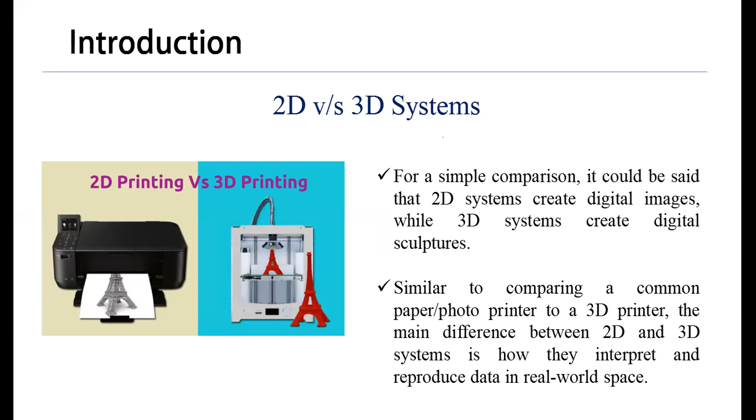So in a 2D system, your depth data will be missing. It is flattened within the two-dimensional space, so the Z-axis information won't be there. Like a photo, the depth is perceived from the shadows and lighting. But a 3D system reproduces a complete 3D shape. Actually, you will get to know the complete shape or the geometry, including depth.

So this depth gives you an advantage in dimensional analysis, whereas a 2D system's strength is only the collection of color data. And why I'm telling this difference between 2D and 3D systems is most of the scanners actually use a combination of both of these. It's not just that you directly get a 3D model or the 3D data. It combines the 2D color maps and overlays them to create a complete 3D final output. So that's why it is important to understand the difference between 2D and 3D systems.

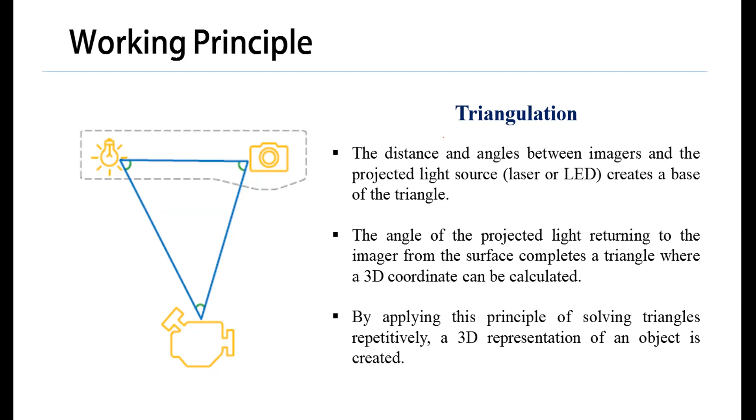If we look at laser triangulation, the only difference is the source of light. Instead of LED, here we are using a laser light, which can be a laser line or a single laser point.

First, the scanner will project a laser onto the object, and that laser light will reflect from the scanned object. That initial trajectory itself will be modified, and this modified trajectory will be picked up by a sensor. Then based on this modified trajectory, we'll be able to detect the deviation angle.

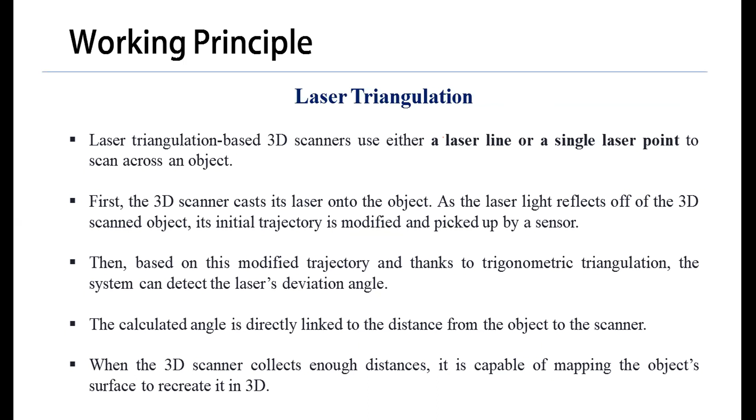This is very important. Based on this deviation angle, you can directly calculate the distance between the object and the scanner. So when the scanner collects enough distances, it is capable of mapping the whole object surface. This is the principle behind laser triangulation.

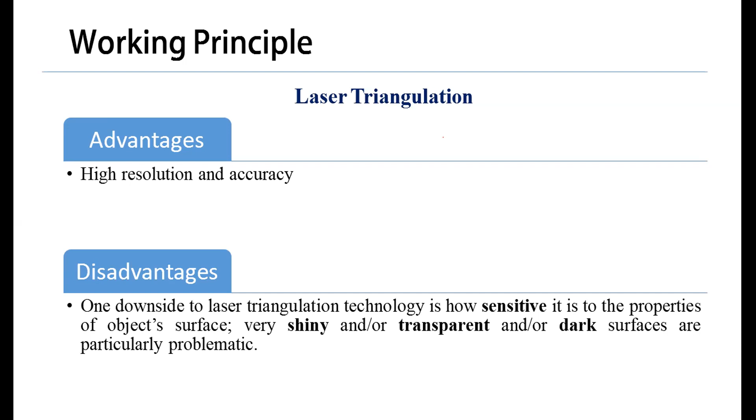If you look at the advantages, it has high resolution and accuracy, but the disadvantage is it is very sensitive to the properties of the object surface. For example, if it is a very shiny or reflective surface, it is not able to capture it, or if it is a transparent or dark surface. These are some of the surfaces which are very problematic when it comes to laser triangulation.

Now the second one we'll look at, this is actually a very popular technology. It's used for metrology grade portable 3D scanners, called structured light 3D scanning. Here the difference is it uses trigonometric triangulation, but it does not rely on a laser.

This light source will project a complete pattern. Normally this pattern can be a series of grid lines or a dotted matrix. The system is then able to examine the edges of each line in the pattern and how the lines are deformed, and based on that it calculates the distance from the scanner to the object surface.

This light can directly use white light or blue light. Standard projectors can also be used in these scanning devices, called digital light processing technology. The projected pattern is usually a series of light rays, which can be a grid pattern or a randomized dot matrix.

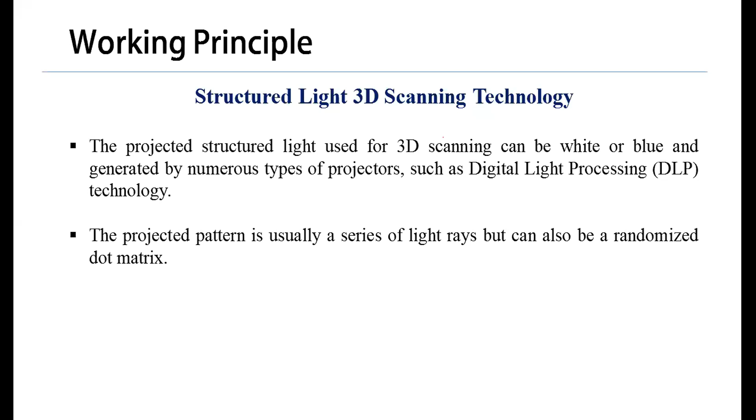When you look at the advantages of structured light scanning, the main advantages are its speed and resolution, because it directly projects the complete series of patterns. With laser triangulation, it was only a laser line, and that line has to travel across the complete part. But here, you can arrange the projector distance so that the whole pattern covers the entire part.

One more advantage is it is non-harmful light, so it can be used for 3D body scanning, as I was telling, for medical imaging techniques.

But the disadvantage is these are very sensitive to lighting conditions. The same advantage we got from the light is also making a disadvantage, that is, it is very sensitive to lighting conditions and it will have trouble working outdoors in broad daylight.

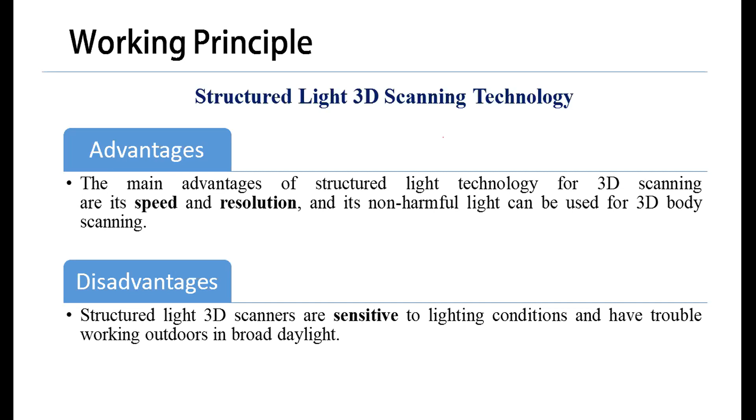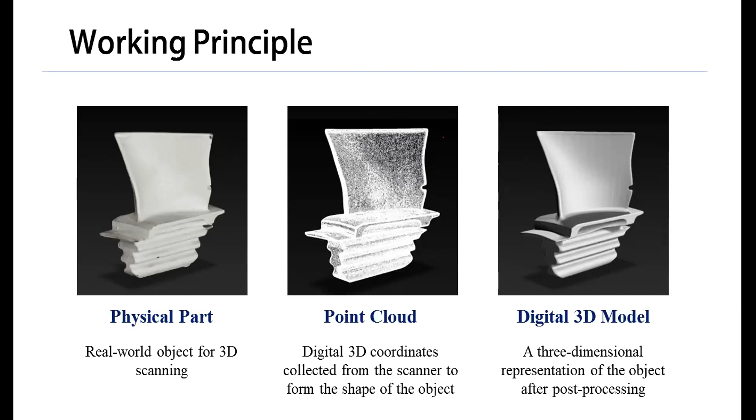Finally, the output we are getting is a three-dimensional representation of the object, but post-processing is required after that. For example, if you are scanning a mouse, you might have kept it on a table, so along with that, even the table will be scanned. That minor geometry cleanup and all is called post-processing, which you need to do so that you get the required object 3D data.

Next we have the photogrammetry technique. But before that, I think we can go for a small demo. I'll just check with my team, Mr. Sumit and Mr. Kiran, if they are ready with the demo. First we'll look at the demo, then we'll come back to the presentation.

I think Kiran... I'll just check with my team. Kiran, I think you can unmute and you can speak.

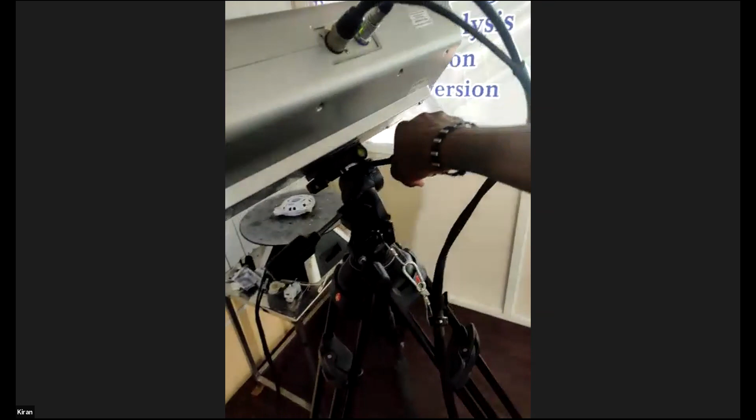It has one camera and one projector. Can you see here? Yeah, we are able to see. This one is the camera, this one is the projector. This is the tripod stand. We can adjust the height here by moving like this. This one is for rotating. This control is for up and down. This one is for axis.

This is the part I have to scan now. It works on the triple scan principle. Can I start scanning? Yeah, you can start it. I will share a screen.

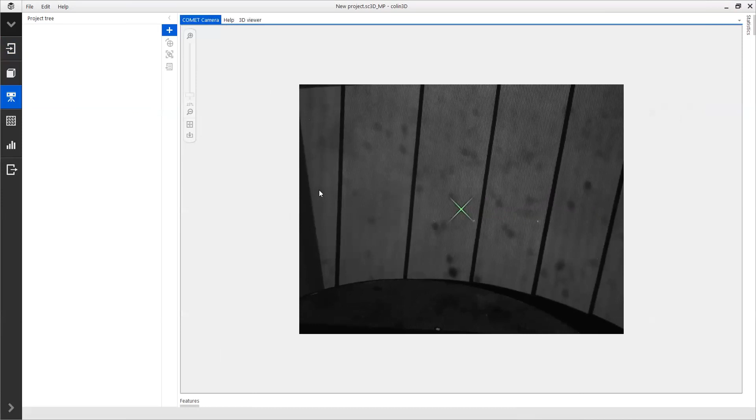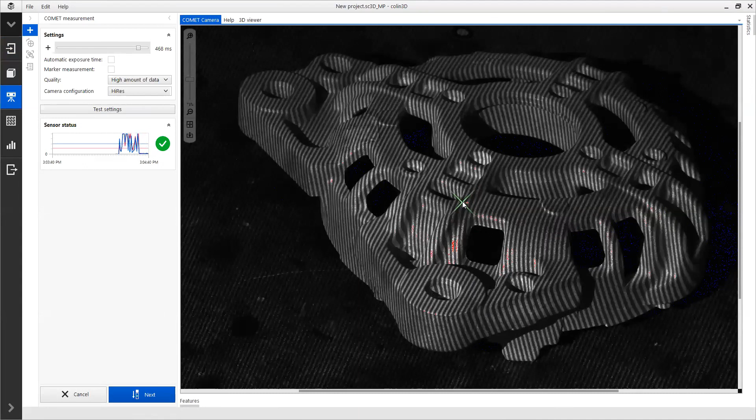There are two options, single shot and rotary. If you click on single shot, I have to adjust. There is a single point laser. Now we are looking at this part. There are two lasers, they should be collinear, like a single point. Then click next, it takes a single shot, so it takes only a 2D image of the component.

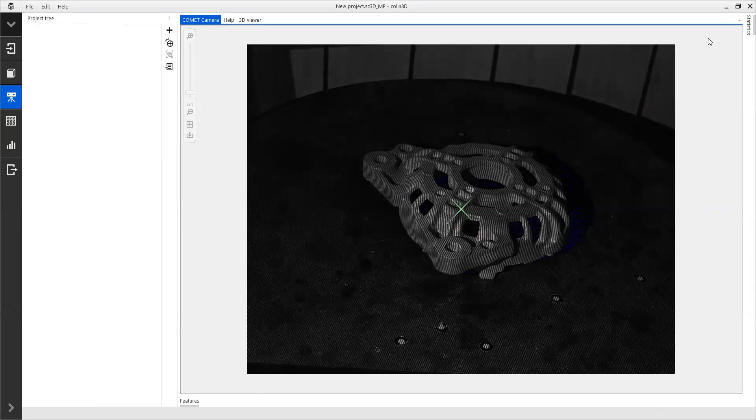Just an error. So that's the laser pattern, right? We are able to see on the part the projected pattern from the projector.

Sorry for the disturbance, just an error.

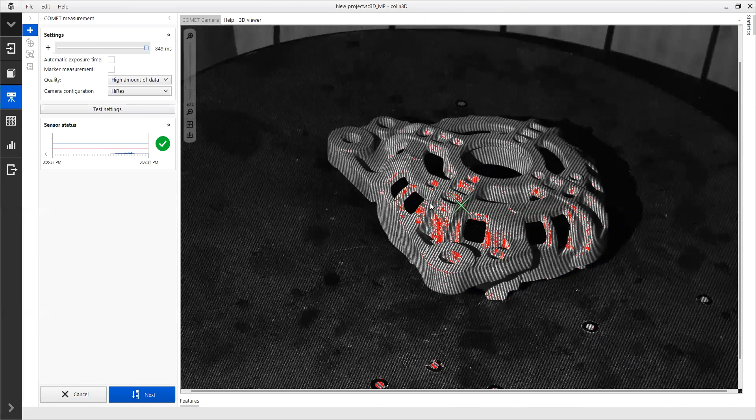There is an option, you have to adjust the exposure light like this. That is exposure time, I guess? Is it the time or the light intensity? Light. If it shows a red color, you have to minimize the light. Then click next.

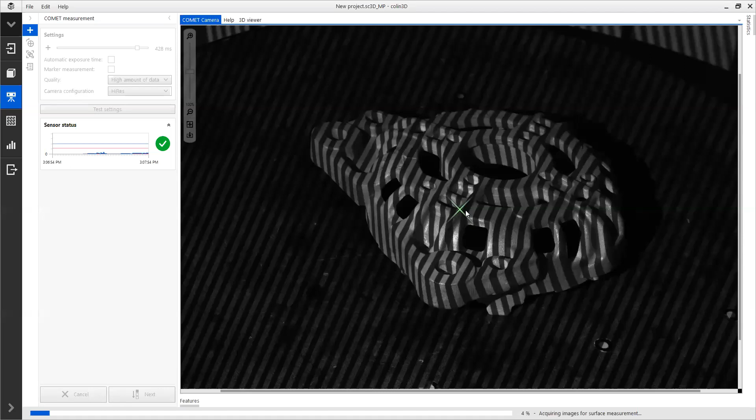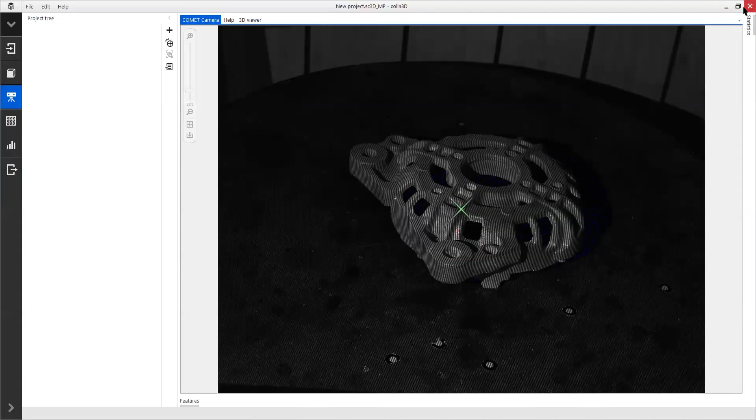Give me 2 minutes time, I have to check. Or I think you can directly show one more option. This is a single frame you are showing now. Okay, just a minute, sorry for the disturbance. Cable is disconnected.

Whenever we talk about 3D scanning, there are two components. One is the hardware capability, and the second is the software capability. Right now we are trying to showcase both. Hardware means the scanners - you can take a white light scanner, or a blue light, or red light scanner. Then to complement that, depending on your application, you need specialized software. For example, OEMs will provide scanning software, but if you need specialized functions like inspection or reverse engineering, there are specialized softwares for that.

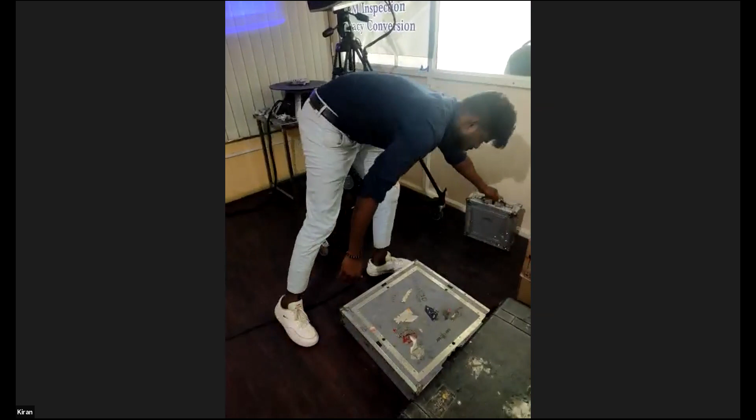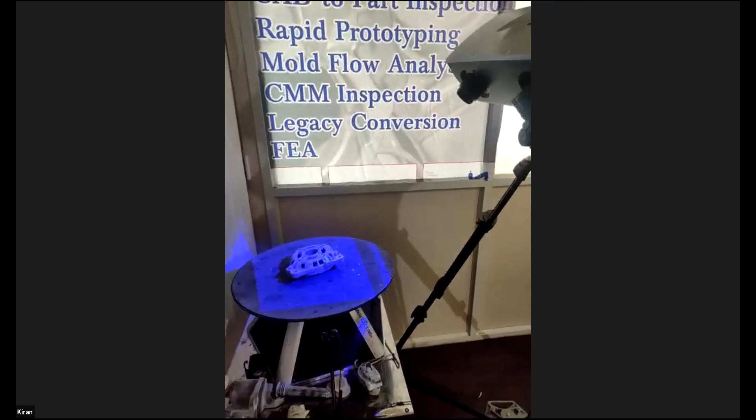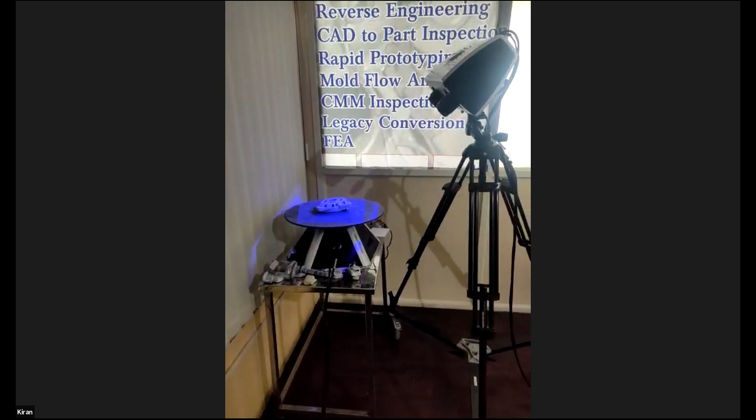I will start scanning now. So is it visible, right? Yeah, we are able to see. Right now the pattern is getting projected on the part. Here two lasers are there. The minimum distance between the part and scanner is 490 mm. The laser should be collinear, should look like a single point.

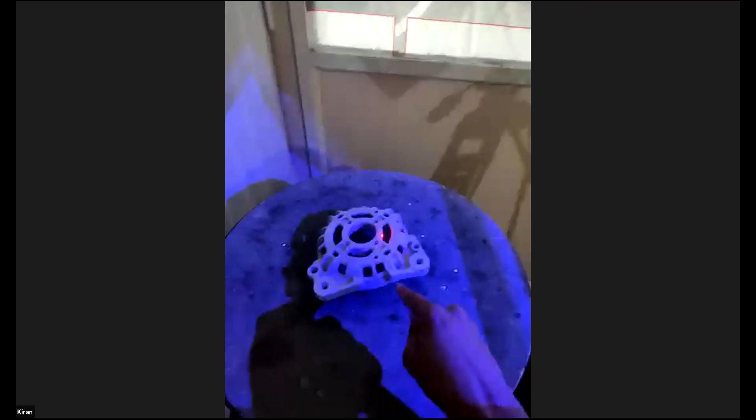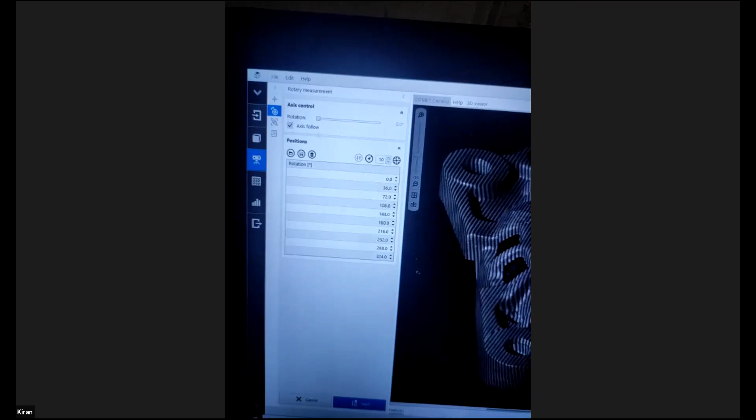Then go to the rotary option - here you can see how many rotations you want, the option is there, you can increase or decrease it. With respect to your part features, you can set the number of rotations, that is divided by 360, so that all features get captured in the scanner. With respect to part features, if it's complicated you have to increase the rotations more; if it has less features, you go with 8 or 7.

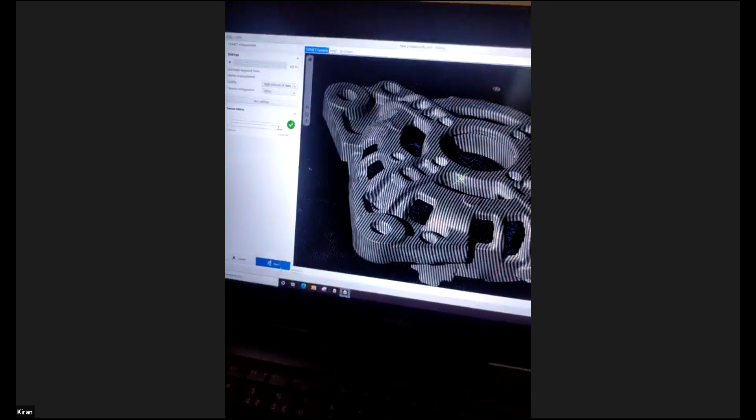Click next. This is the sensor status - it should be in a right tick, it should be in green. If it is not, something error has happened which shows a cross mark. No, not focused - then focus on the part, then it came green, then click next.

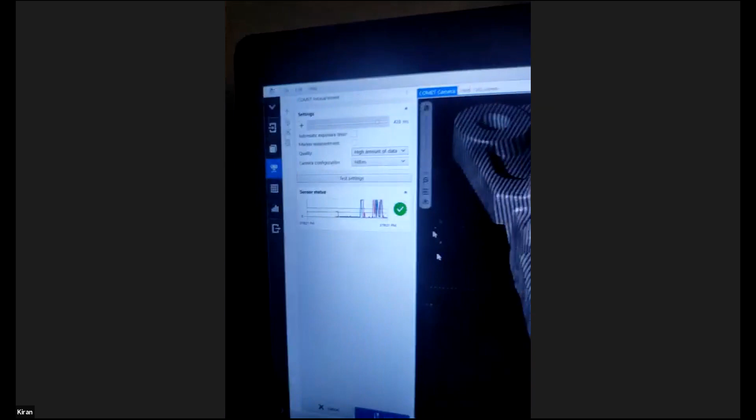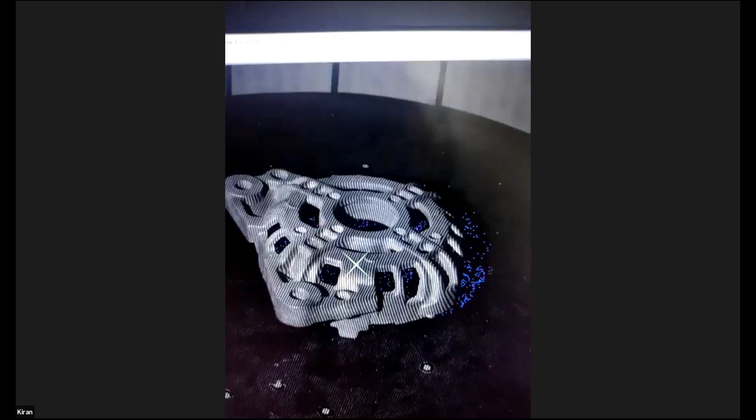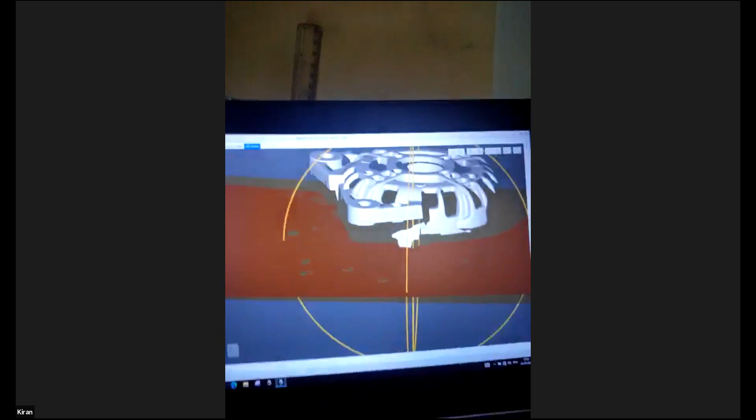This is the fringe projection - layer by layer it will capture the features and surface of the part. Is it visible clearly? Yeah, we're able to see. Right now the model has to be constructed. Then you have to cut the base part - you don't need this base part, you have to delete the extra material. Then click next, and the system will automatically take the next shot.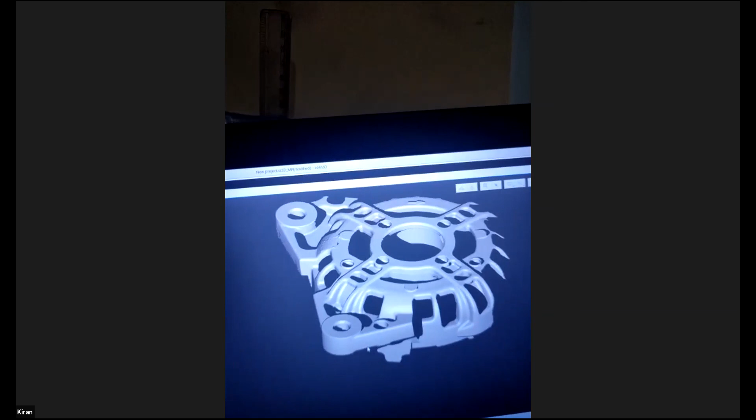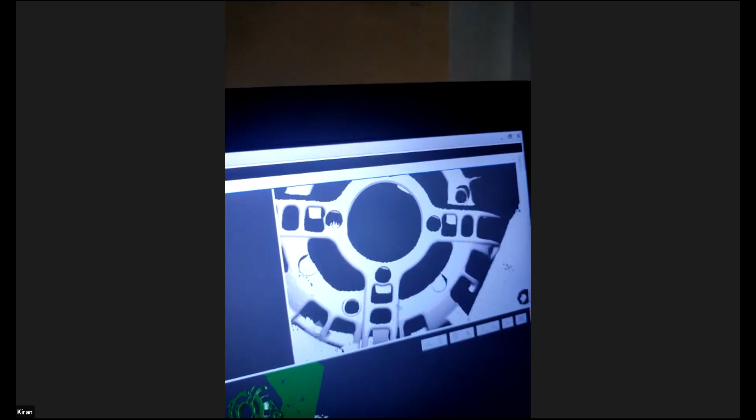Then you have to match the first shot and second shot by features base. Okay. Then click the features. In the third view, you can see the first and second matching. Then the system shows status: alignment is successful. One more option is there if you want to check the deviation of alignment. It is 13 microns, 0.013. Okay.

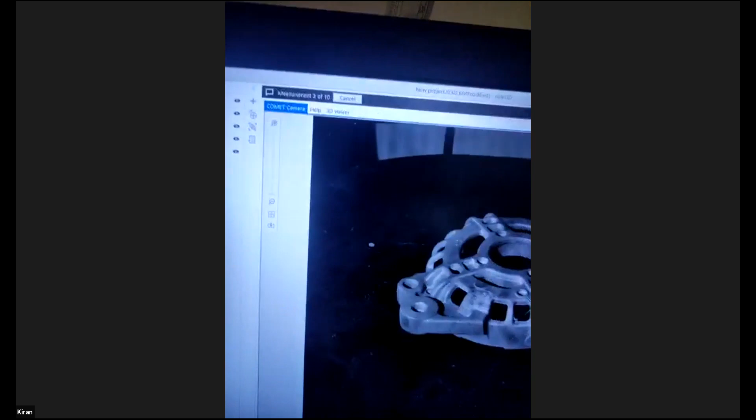Then right click, now the next. Only the front part got captured, right? Yeah. Given 10 rotations, it automatically matches with respect to the given features base. You can see the rotary, it automatically turns.

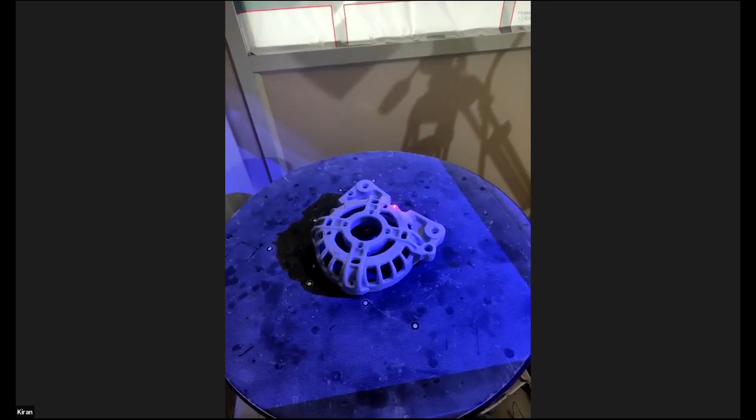So that is a rotary table, right? Yeah, this is the automatic rotary table. You have to give the number of rotations. But in terms of orientation, to capture the backward one, you have to change it again, right? Yeah, again you have to change the part, rotate it, and scan it again.

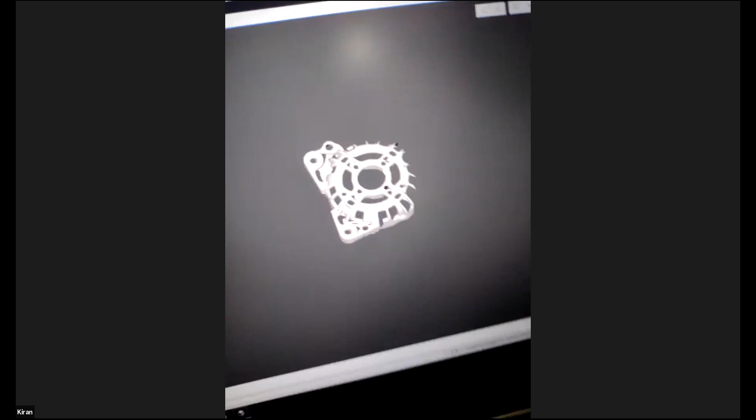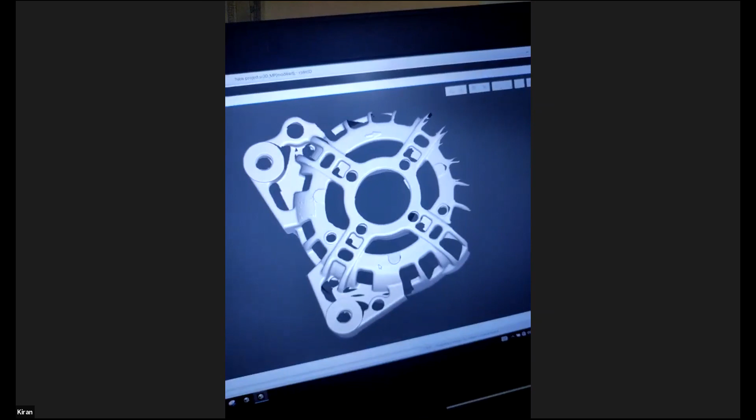Let's see the data. You can see the number of rotations here. 5 rotations are completed till now.

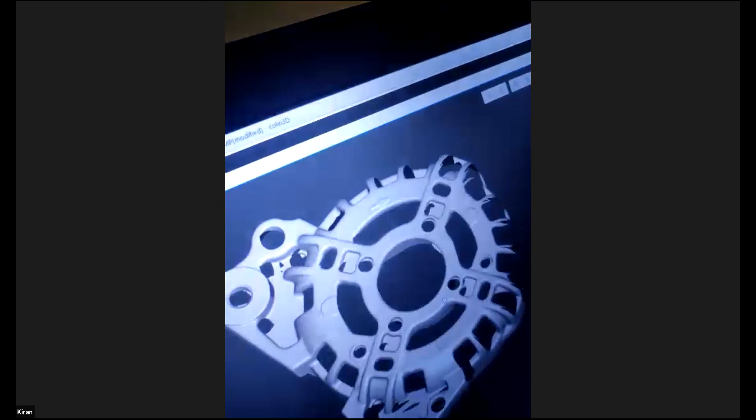And what's the approximate time it might take to capture this complete object? It depends on your part size and features. If you give more rotations, it takes more time. Then you will get the fine details, right? Yeah, you get the fine details. The whole complex geometry, you can get it.

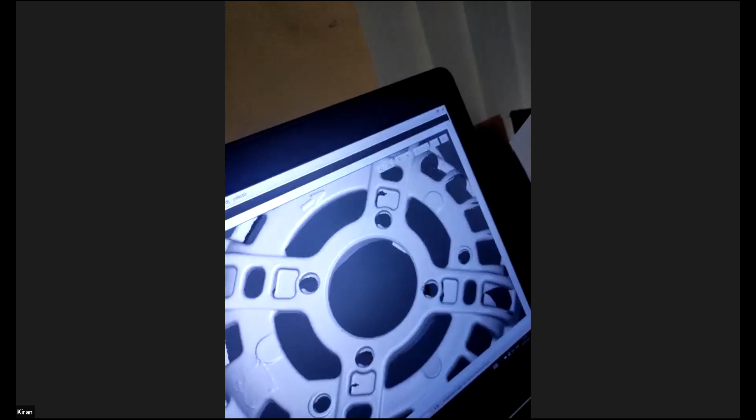So what features can it not capture? Like threading, will it be able to capture it? You can, sir. The whole thread is not possible, but one side face you can. Okay. Then shiny parts, like mirror objects, you have to spray. Yeah.

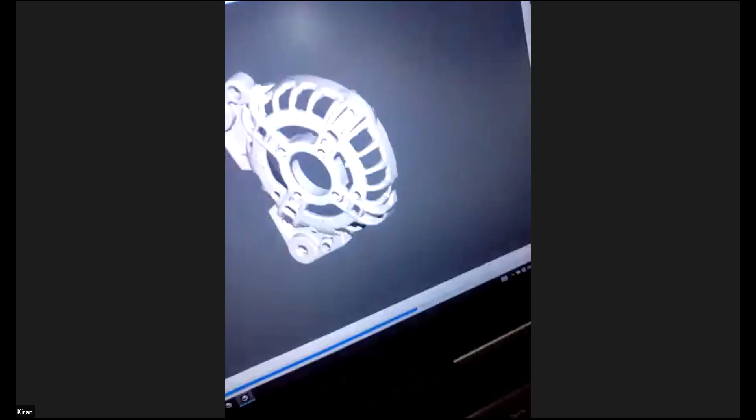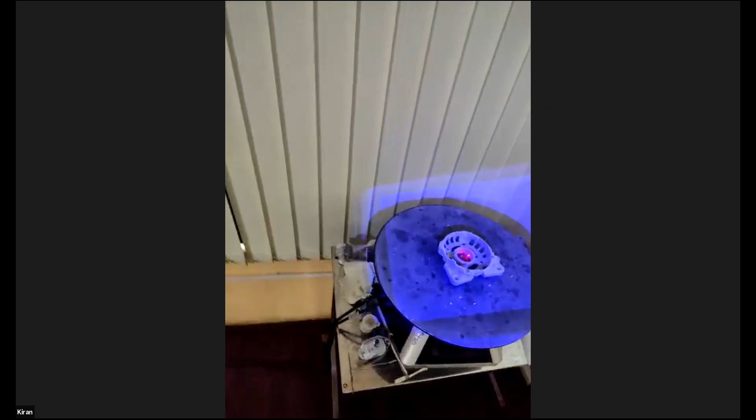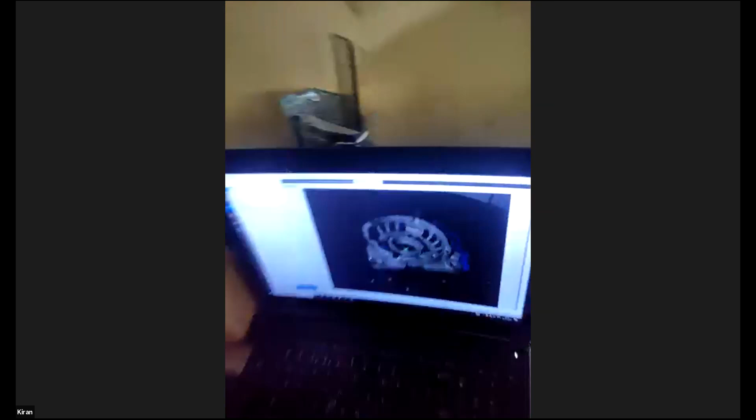One side is completed till now. For the other side, you have to create one more sequence. Again, click on rotary. It automatically takes the second one. Now I have to decrease this. Then you have to change the part to the next side. Then click next.

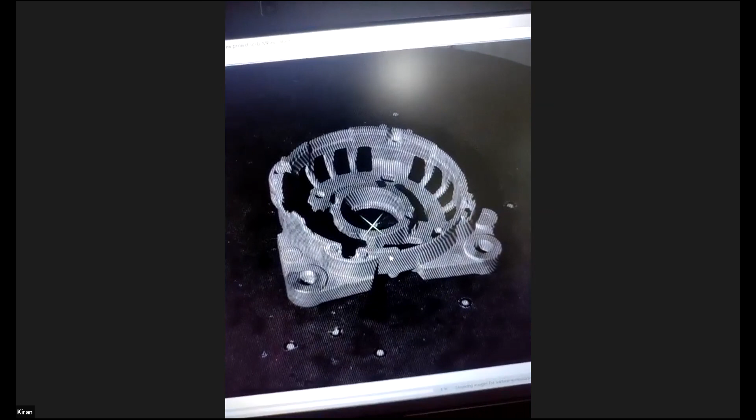For the second sequence, you have to repeat the same procedure: cut the base plane and match the first shot and second shot. So roughly around 10 to 15 minutes it will take for this part. Yeah, it's enough. And generally, what are the challenges you might face when scanning a complex part?

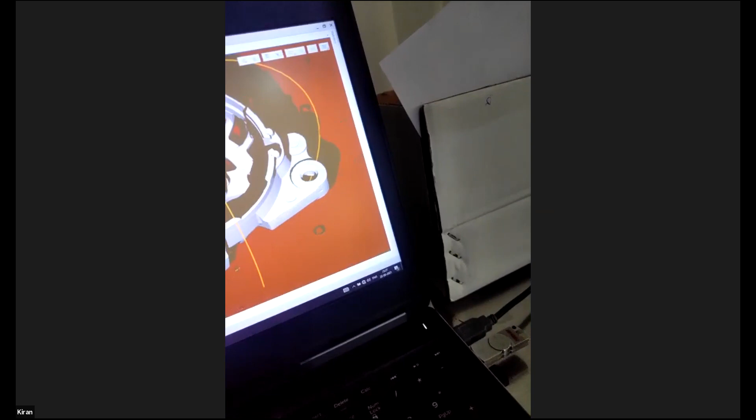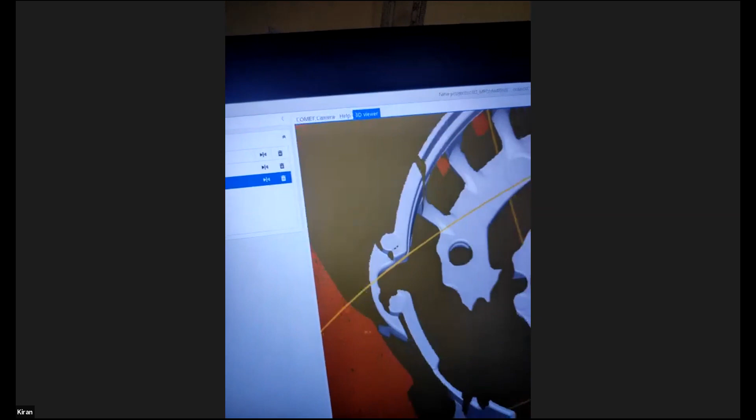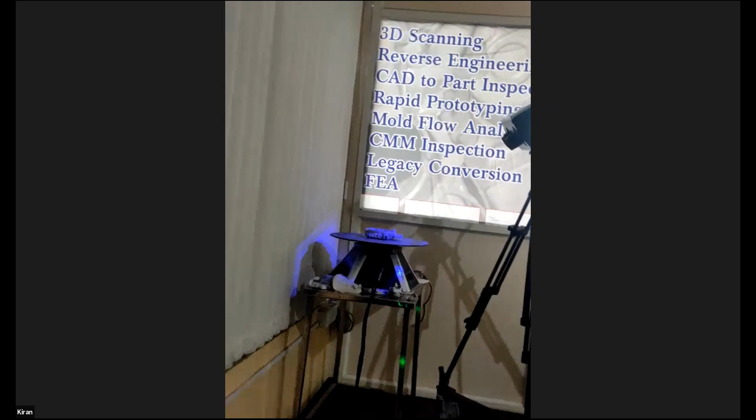Some parts need spray, like I already told, mirror. If you have a mirror-based part, you need spray for that. And some other complex geometry, to capture inner deep areas you have to adjust and take a single shot. If I need this whole completely, I have to adjust the camera: increase the camera height and take the upper shot. By taking a single shot and matching it, we get the complete features.

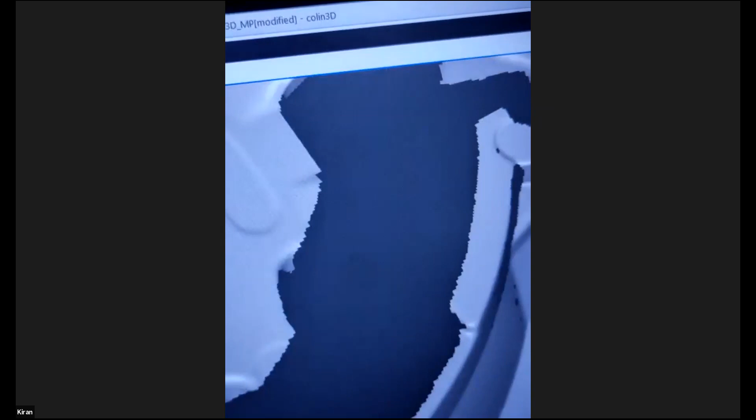It is only because the light is not able to reach that area, right? Yeah. Whatever the sensor can see, that amount it will capture. You have to adjust the camera, like taking photos, you have to adjust the focus. Same like that.

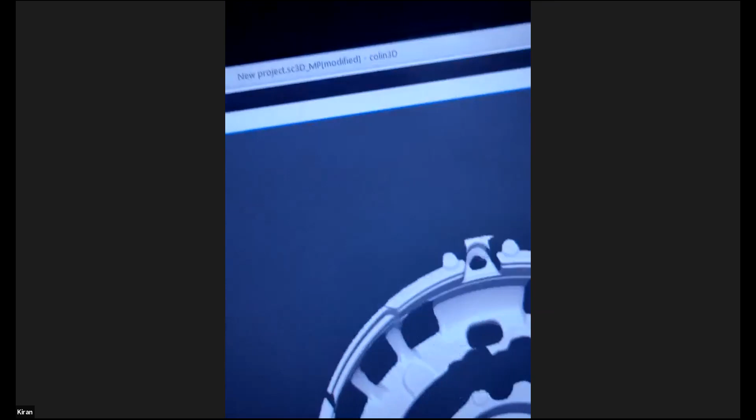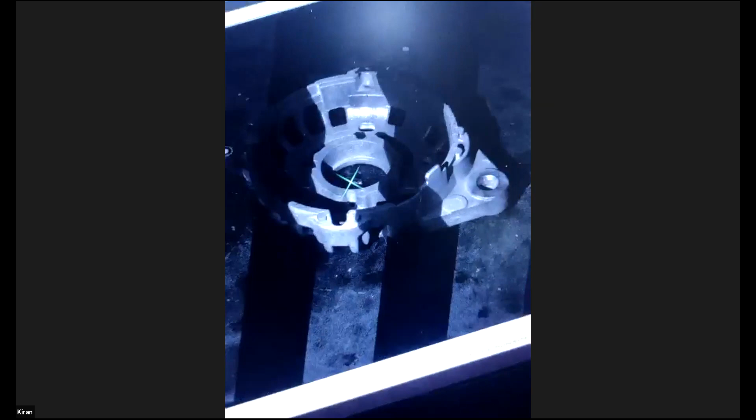I think everyone might have got a pretty good idea about how 3D scanning works and what the challenges are. Similar to taking a picture, you need to capture all the features. Wherever the light can pass, that feature you will be able to get. The time, you saw, was roughly 10 to 15 minutes for that part. But the final output would be a 3D model, so with post processing and reverse engineering you'll get all the 3D features with all dimensions. You can use it for reverse engineering, modeling, inspection, 3D printing, anything.

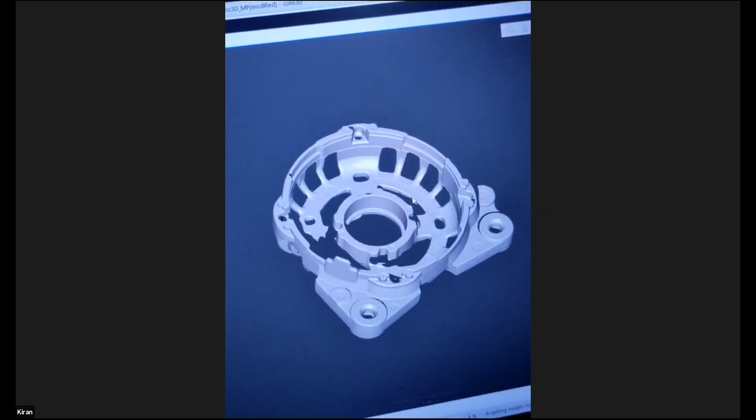If I do it manually, I will have to measure all the individual dimensions, create a 2D drawing, then convert it into a 3D model. This is the normal workflow, right? But with 3D scanning, you directly get the 3D model and all those dimensions accurately, to the range of 50 to 100 micron accuracy. Now you can see pretty much the complete part.

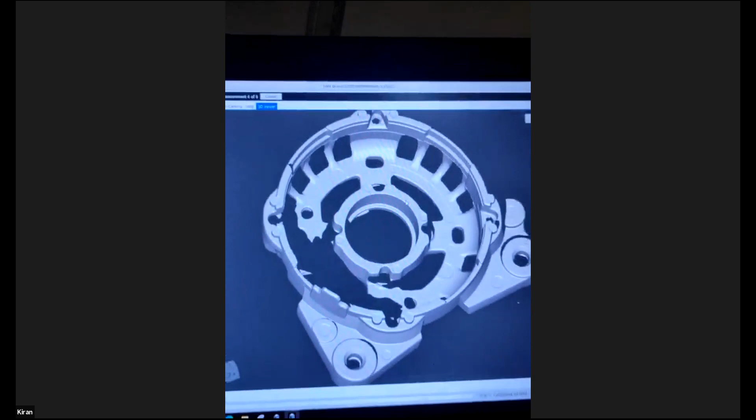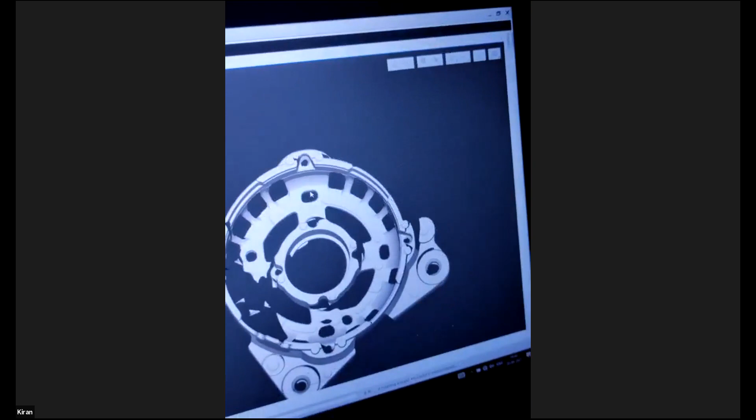So the alignment software handles any minor shift while you are rotating the object. You just change the orientation, top to bottom. Just zoom in now to see what features they captured. The alignment is automatically matched. I already gave 2 points in the initial alignment, and on that basis they are automatically aligned. If you place markers around the part, we don't need to give the features alignment. It automatically matches with respect to the reference points.

I think pretty much we got the component. So thank you, Mr. Kiran, for showing us the demo of the scanner and how it works. Pleasure, sir. Thank you. Sorry for the error. It's okay. There will be these glitches, how much ever you prepare. So I'll just continue with my presentation. Okay, and then I will show the final data. Thank you once again, Kiran. Okay.

So we just saw how that projector based scanner works and how much time it took for capturing all those data. But still, compare it with the conventional way of making a 3D model, that is by measuring all the dimensions. That component maybe had 50 to 100 dimensions, and all those you need to capture accurately.

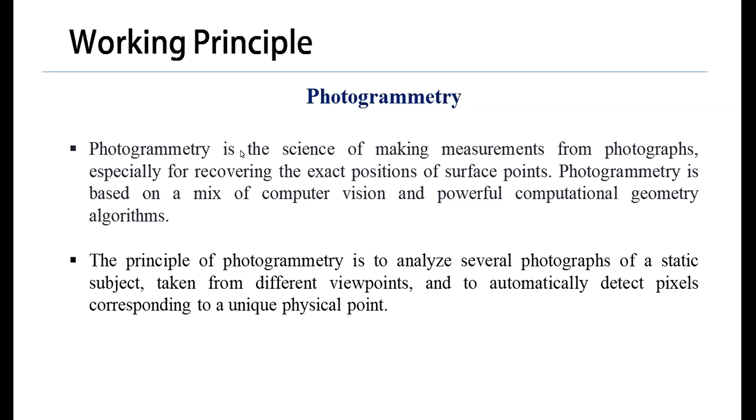A refined definition: it's the science of making measurements from photos, especially for recovering the exact positions of surface points. It's based on a mix of computer vision and computational geometry algorithms. The subject should be static, and the photos taken from different points. Then an algorithm automatically detects pixels corresponding to a unique physical point. This is the principle of photogrammetry.

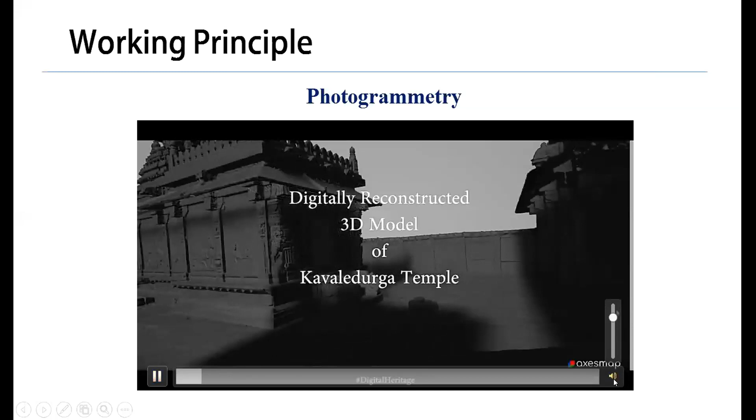Now I'll show some photogrammetry projects done by one of our channel partners called Axesmap. They are also a very motivated startup like us. Now you can see a digitally reconstructed 3D model of the Kavaledurga temple. They used drone cameras and professional cameras to completely capture the temple. This is one very interesting application.

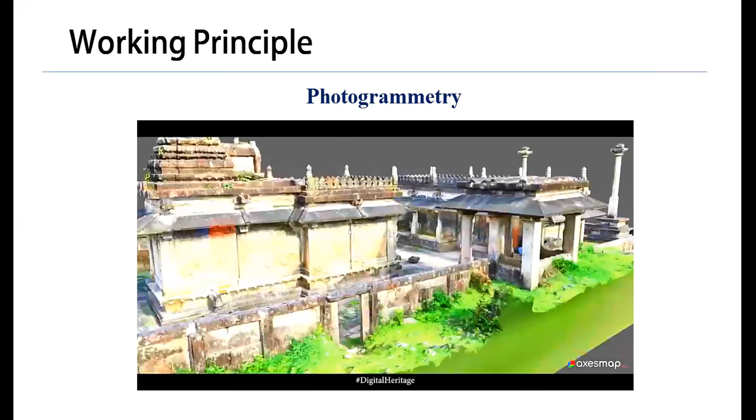It's called digital heritage. If you want to preserve monument data in digital format, that is where you can go with photogrammetry. Now you can see the complete look of the temple, exactly how the temple is. This is part of a digital heritage project.

This object's 3D data will be in .obj format. That can be converted into a 3D printable format called .stl. Maybe in the morning session on the overview of 3D printing technologies you heard about the .stl file, the standard tessellation language file. With that you can 3D print this exact model. That is how the workflow is interrelated.

With this technology, the main challenge is you need to examine tens or hundreds of photos. If you want to capture very fine detail with high accuracy, sometimes you need to capture thousands of photos as well. And to run these algorithms, you need a very powerful computer with very good computational and graphics power to handle that. So that's one challenge with photogrammetry.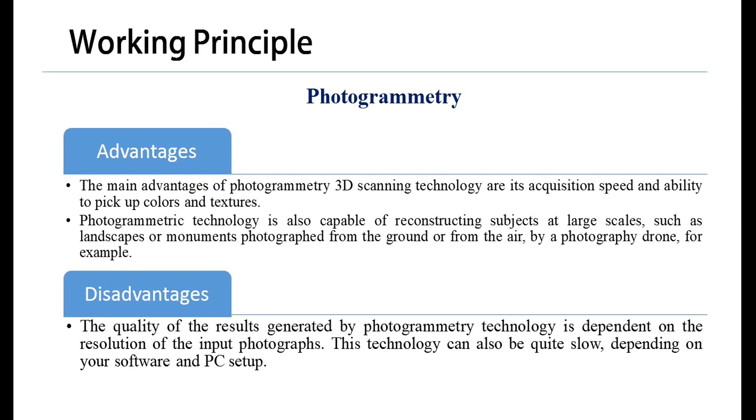One main disadvantage is that it is dependent on the photo quality. You need to give very high resolution photographs as input. Again, if you want to run this on your regular desktop computers or PCs, it will be problematic. So that's one disadvantage of photogrammetry.

Next comes contact-based 3D scanning technology. This has been the industry gold standard. Many industries are using this touch-based or probe-based 3D scanning technology. It's also called digitizing. There will be a touch probe that physically goes and touches your complete part or component. That is how it records the 3D information.

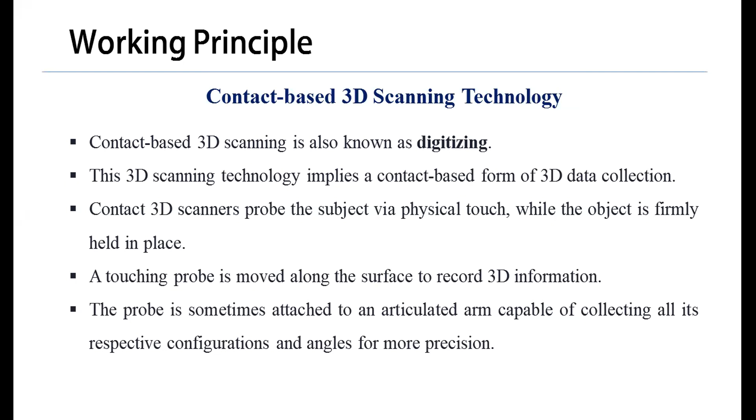Sometimes it is attached to an arm as well, normally FARO arms, you might have heard of them. These touch probe scanners can be attached to these arms so that the movements can be coordinated more precisely. Here you're seeing a specific configuration, also called a CMM, that is, coordinate measuring machine. These are very precise, very accurate machines which can calculate the complete 3D data of a part. Here you are seeing a small animation of how the probe works. It is widely used to perform quality control. In all QC operations, CMM reports are used.

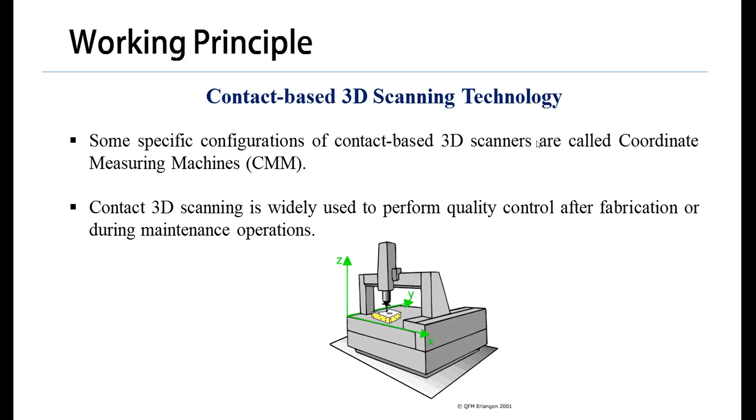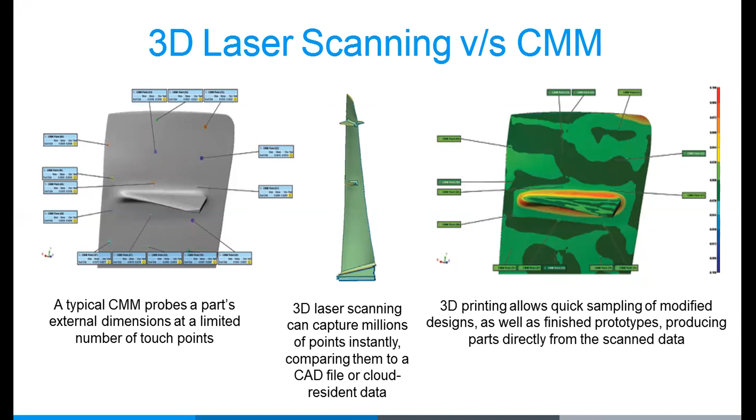If you compare 3D laser scanning with the conventional CMM, the CMM is based on a limited number of touch points, whereas with a laser scanner the complete laser field is incident on the part, so the number of points will be more. Normally we look at 10 million, 15 million points. So it can capture complete surface data compared to a CMM. This allows a good capture of data, and it will be cloud-resident data. You can directly send it for 3D printing, redesign or a physical prototype. And these portable scanners you can take directly onto the shop floor and use. So that's the advantage of 3D laser scanning.

The main thing is it is very precise and has the ability to 3D scan transparent or reflective surfaces. On the downside, it is a very slow process and it is not able to work with organic or freeform shapes. So that's the disadvantage of contact-based 3D scanning technology.

Now let's look at the last principle, that is, laser pulse based. Many of you might have heard of this. It's called LIDAR. It's similar to the radar concept. Radar is radio detection and ranging; LIDAR is laser based. You know the speed of light and you project a laser light. This is mainly used for calculating very long distances.

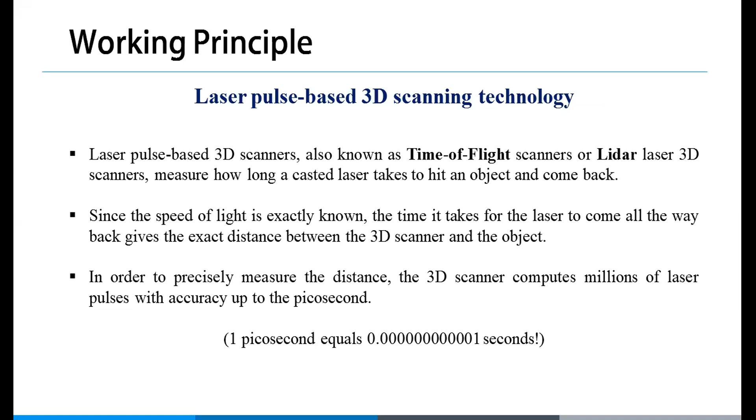For example, you might have heard there's a laser mirror that they have kept on the moon so that you can measure the distance between Earth and the moon precisely. Laser pulse based 3D scanners work on a similar concept. It's also known as a time of flight scanner. It just calculates the time, and since you know the speed, you can calculate the distance. In order to precisely measure the distance, these scanners compute millions of laser pulses with an accuracy of up to a picosecond. Here you can see the accuracy you are getting, 1 picosecond, and how minute a scale it is able to capture.

On the left side, you are seeing a small animation of a LIDAR. One more thing: since each measurement collects only 1 point, if you want to capture the complete 360 degrees, you need to rotate that laser point. That is why the scanner is usually fitted with a mirror, which changes the orientation of the laser. In the animation, you can see the scanner's mirror rotating so that you can capture data over the complete 360 degrees.

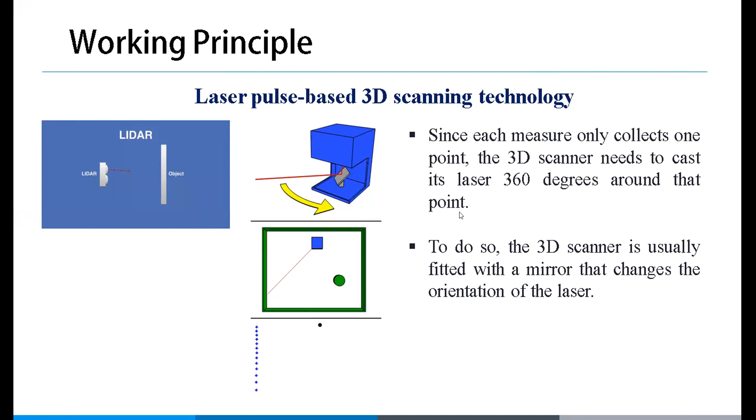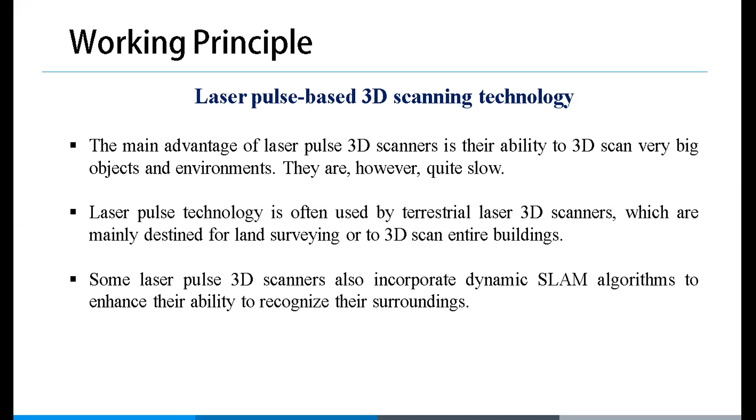And the main advantage is they have the ability to scan very big components or the environment. So if you want to scan entire buildings, you can use these laser 3D scanners. And if you want to survey some lands, you can use this. And some laser pulse scanners are also equipped with dynamic SLAM algorithms, that is, simultaneous localization and mapping algorithms. Through that, it will enhance the ability to recognize your surroundings as well. So this is the laser pulse based 3D scanning technology.

And coming to applications, majorly there are three applications. One is, whatever the part is, if you scan it, you will get the triangulated data or the mesh data. That mesh data you can directly use for part inspection. That is, if you have a part and you want to check its features, it can be used there, like in quality control.

Or the second application is you want to reconstruct the entire model. For example, you have a very old part, and you don't have the drawings or the designs for it. Then you do the 3D scanning and you get the 3D model. You reconstruct a complete 3D model, then you can get the drawings of that component. Then if you want to produce it or go for manufacturing, you can use those drawings. That application is called the reverse engineering application.

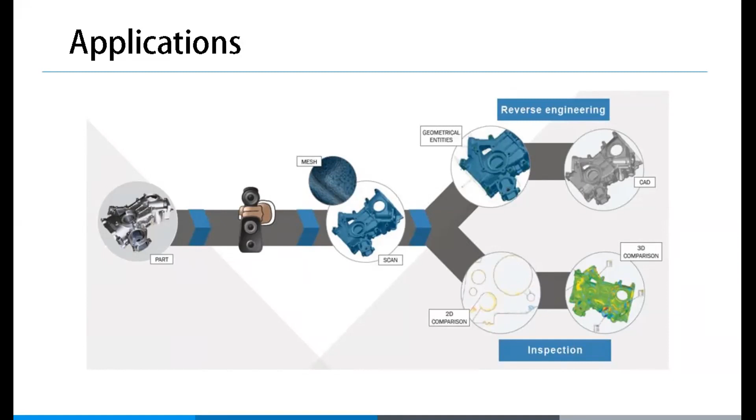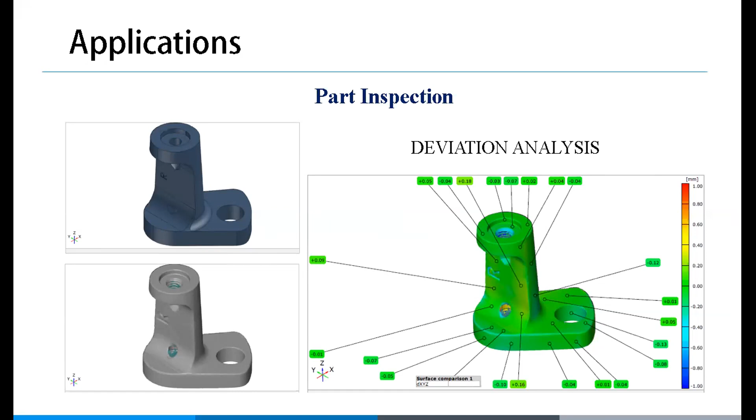Then reverse engineering, as I told you, you need to extract the dimensions to reconstruct a CAD reference file. In most reverse engineering scenarios, you won't have any drawings with you. That is why you go for reverse engineering. The common use cases are, you want to make a new part from an existing design, or you want to make a new part that interfaces with an existing part. For example, there's a mating part, and you are redesigning a completely new part for that. Then you need reverse engineering.

And if you want to understand the competitor's design, how it is unique from ours, then you use reverse engineering. Or if you want to optimize an existing design, then you go for reverse engineering. So these are some of the applications where we use a 3D scanner for reverse engineering.

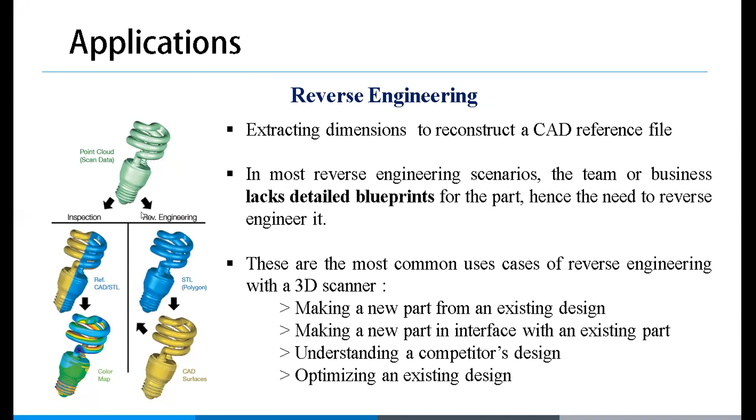On the left, you can see the scan data is always point cloud data. If you're going for inspection, that will serve as your reference CAD or the STL. And if you overlap it with the original CAD, that will give you a color map. In the reverse engineering application, that STL data is the polygon data or the mesh data, which again needs to be converted into CAD surfaces. That's called the reverse engineering process.

Now let us look at the future scope. According to a recent survey, it's been estimated that the 3D scanning market will grow at an annual rate of 15% over 5 years. In that, the majority of market share will be that of portable 3D scanning, because nowadays the complete digital manufacturing workflow is getting adopted.

Portable 3D scanning means you can directly take it onto the shop floor, and whatever changes are there, you can directly make them. That is how portable 3D scanning is becoming popular. Why? Because they have the convenience as well as the flexibility for a wide variety of applications, including all industries; they will have PLM with them, so you can directly adopt it to your PLM.

And it is very simple to operate. The complete process has been automated. You saw even the turntable has been automated, so you don't need to manually rotate it. That's the level of automation, and lower cost. Compared to your conventional CMM, it is much cheaper, and you get greater accuracy, speed, as well as reliability for mission critical projects. So this is the future scope of 3D scanning.